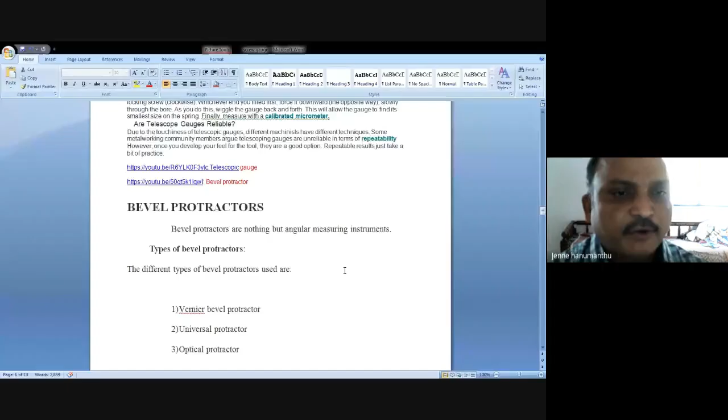We'll see. First of all, bevel protractor. So what is a bevel protractor? Bevel protractors are nothing but angular measuring instruments. These come under angular measuring instruments. There are different types, but vernier bevel protractor is a vital instrument for measuring unknown angles.

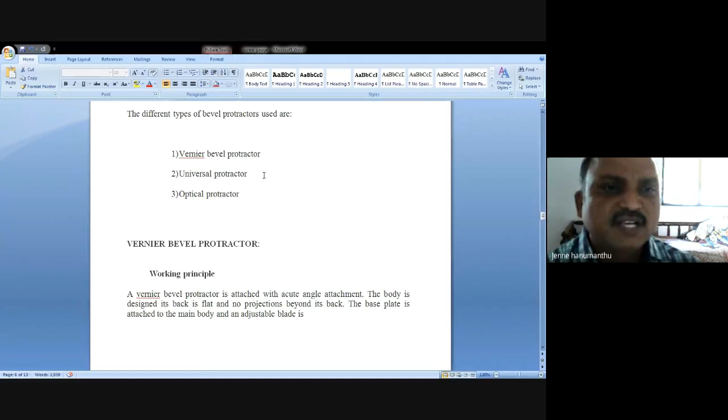Vernier bevel protractor, the parts are basically like this. Observe the parts of this. I'll give some video link for this, don't worry, you can observe.

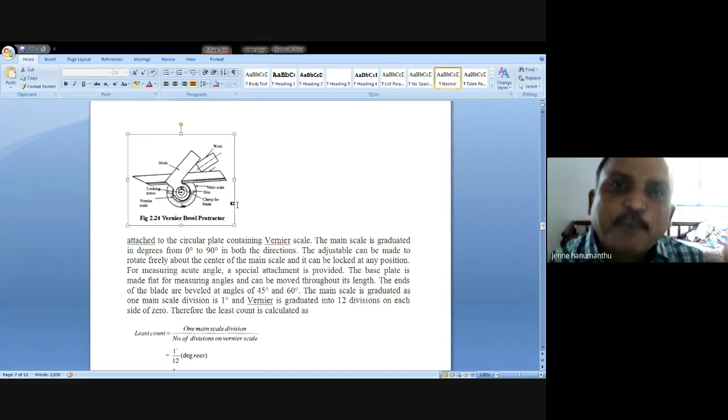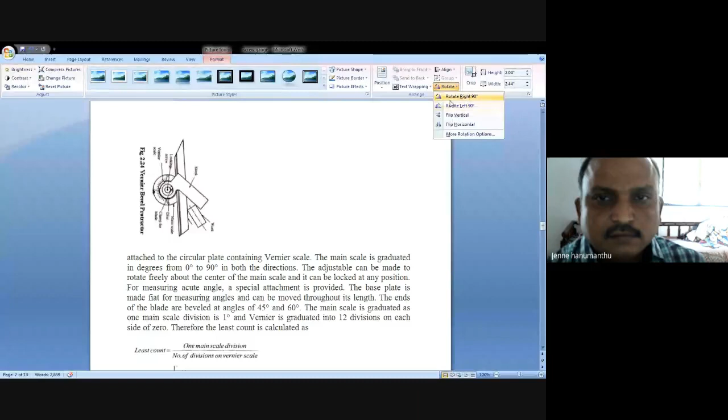This vernier bevel protractor has two scales, like vernier caliper. The bevel protractor also has two scales. One is the main scale. All of you observe clearly. This is called the main scale.

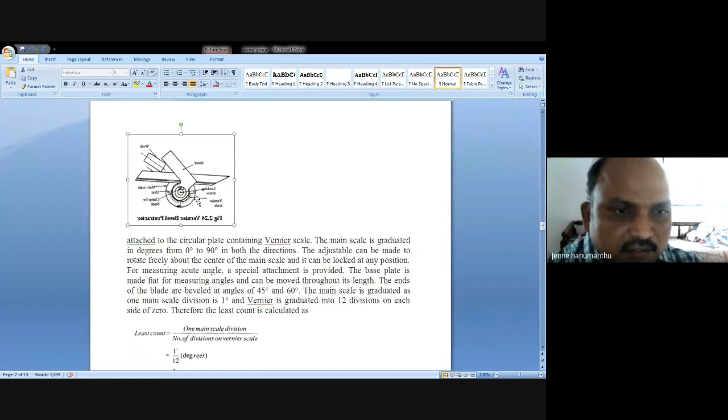Is it visible to you, Kamali? Yes, sir. This is called the main scale. The main scale is divided into a number of divisions in terms of degrees.

Next, internally we have another scale. This is called the vernier scale. So we have the main scale and the vernier scale.

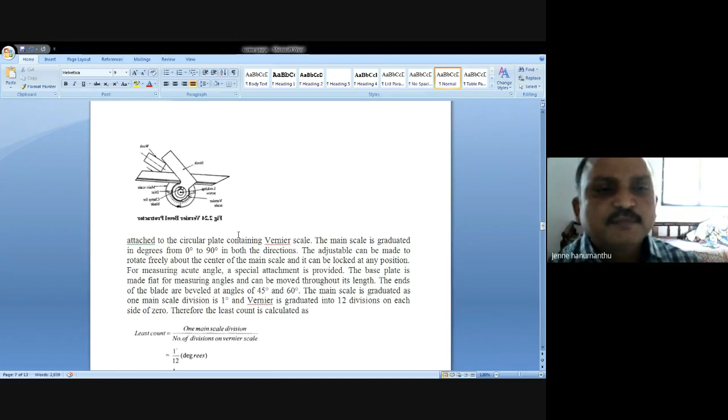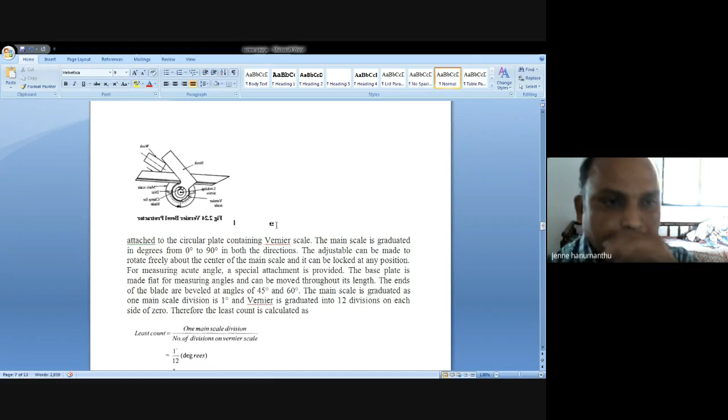But the question is, how do you calculate the total angle? Total angle means, first of all, you take any material for which you want to calculate the angle.

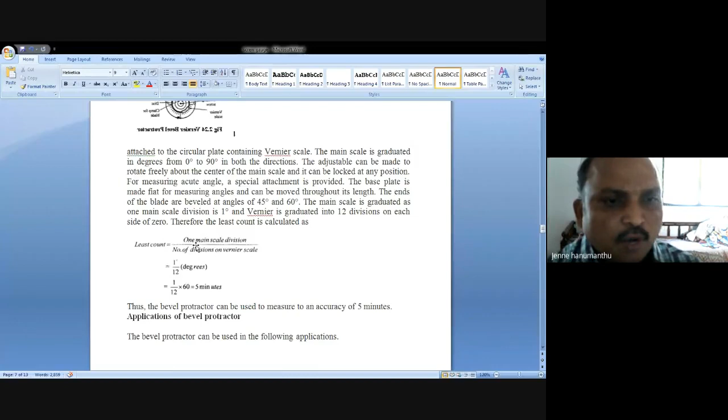Before that, least count. For example, least count equals one main scale division divided by number of divisions of the vernier scale. This is the usual general formula: one main scale division divided by number of divisions of the vernier scale.

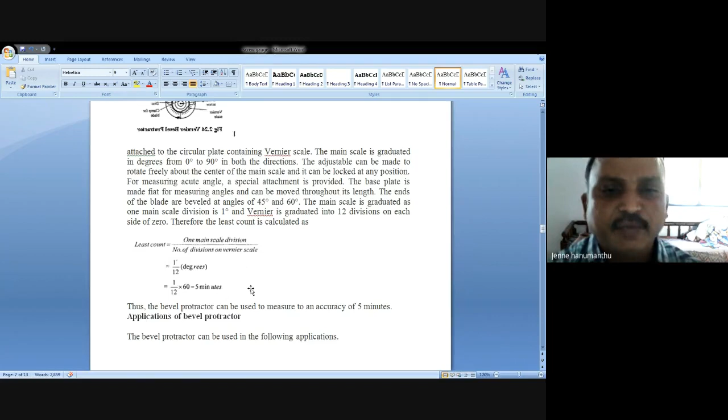So one main scale division is 1 degree, divided by number of divisions on the vernier scale, which is 12. So 1 by 12 into 60, because we want to calculate in minutes. So 5 minutes you make it, so the least count is 5 minutes. We are speaking in terms of minutes rather than degrees.

Then the unknown workpiece is placed here. Say it is an unknown workpiece, called the workpiece. For this, we want to calculate the angle. How much angle is this workpiece provided with?

Remember, this is called the base. In between these two, we are placing our workpiece. We want to measure this angle. How much angle is it?

With the horizontal line, this is horizontal. Horizontally, how much angle is it going to provide? That angle we want to calculate. So it can be calculated.

It is adjusted using both the main scale and the vernier scale. The two are disturbed from their initial position. When you insert the workpiece, these two are disturbed, and it provides some angle. Because of that angle, the divisions on the main scale as well as the vernier scale are disturbed, and the scales get modified.

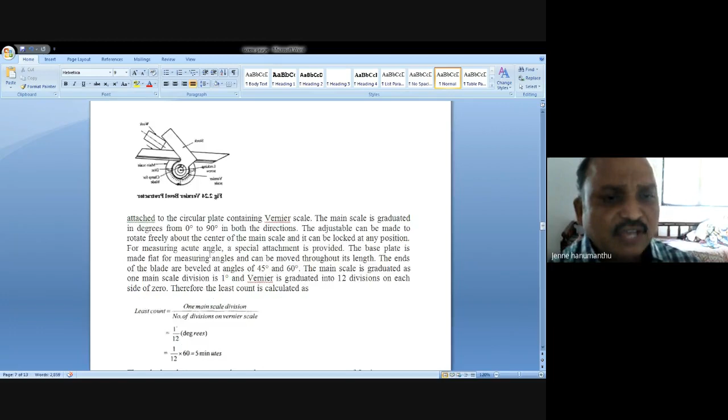That reading you want to calculate. How do you calculate it? I will tell you the calculation. Main scale total reading equals main scale reading. How do you calculate the main scale reading?

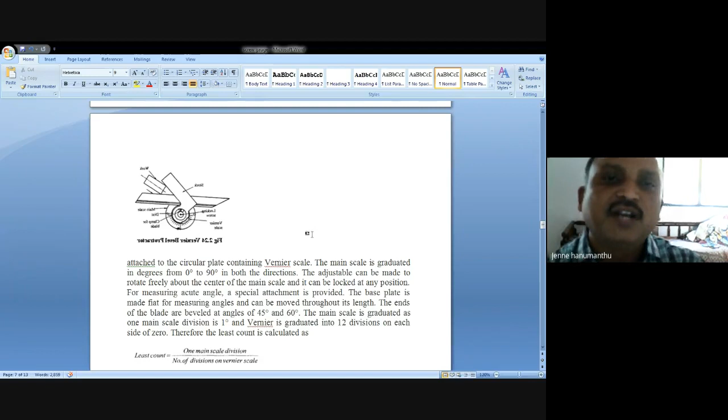The zero on the vernier scale will touch or coincide with one of the readings on the main scale division. That gives the main scale value. One of the readings on the vernier scale will coincide with other readings on the main scale, giving a vernier reading. That should be multiplied with the least count. So add the main scale value plus vernier scale reading into least count to make the total reading. That is how we measure the angular value of the unknown workpiece using the bevel protractor.

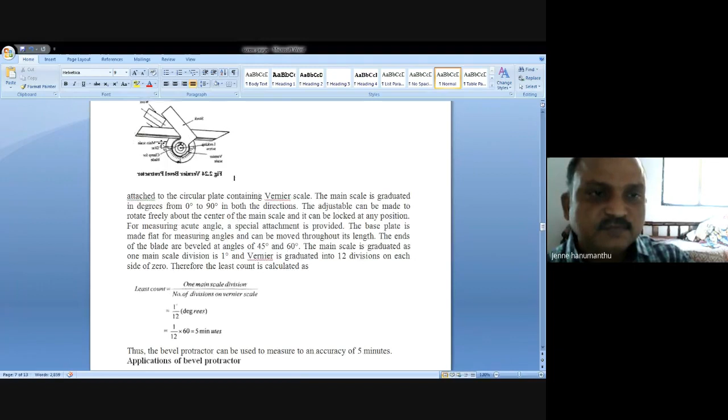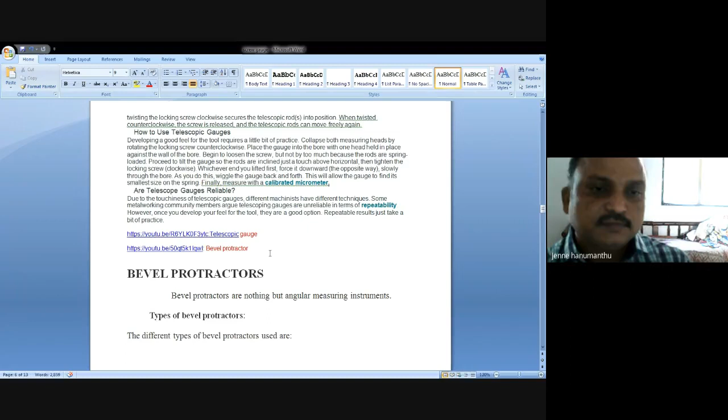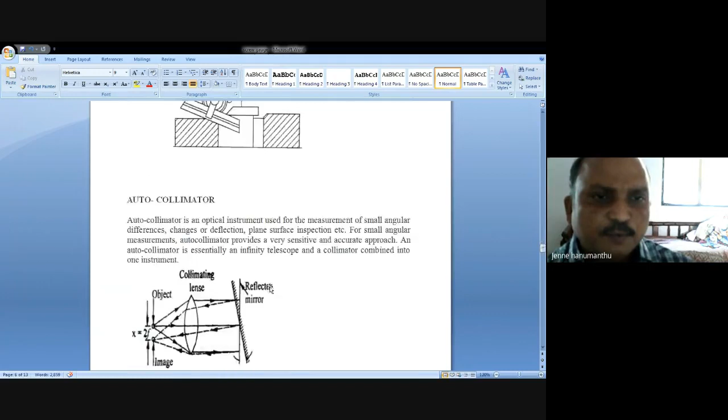This is called a vernier bevel protractor. We place it not only for a simple workpiece but also for different dimensions. For example, for checking a V block, a complete block, this corner, this V-shaped line angle can also be measured.

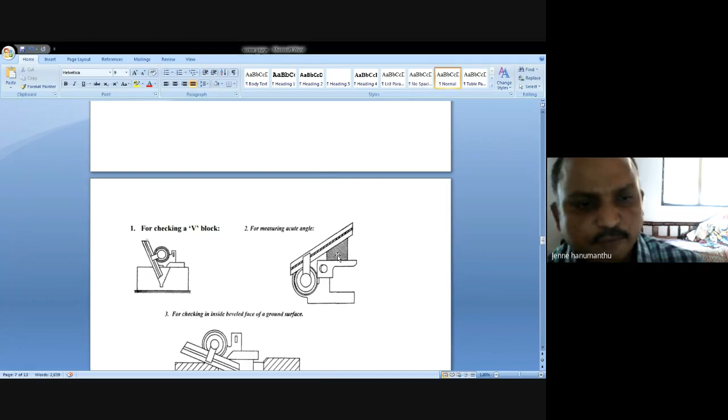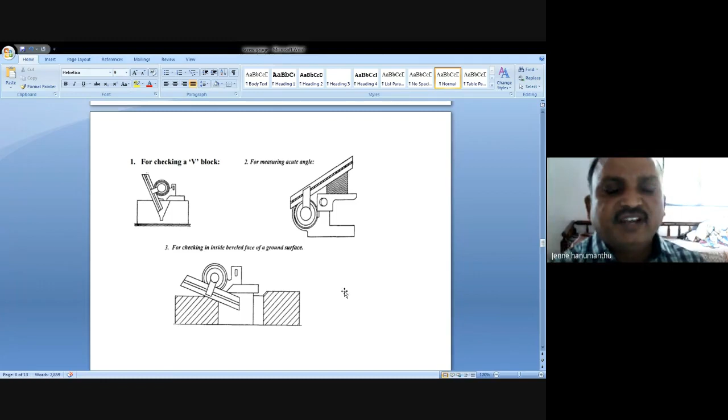For measuring acute angles, you place this type of unknown workpiece and measure like this. For example, at the end corner of this workpiece, you can also measure the angle. So the angle of any workpiece is possible with the bevel protractor. The only thing is main scale value plus vernier scale into least count, which gives the total reading in terms of minutes, or you can convert it into degrees. That is about the vernier bevel protractor.

Next is the sine bar. Sine bars are always used along with slip gauges as a device for measuring angles very precisely. The main advantage of the sine bar is that it measures angles more accurately than the bevel protractor, and it locates the workpiece to a given angle with high precision. So the sine bar is more effective and accurate than the bevel protractor because of its structure.

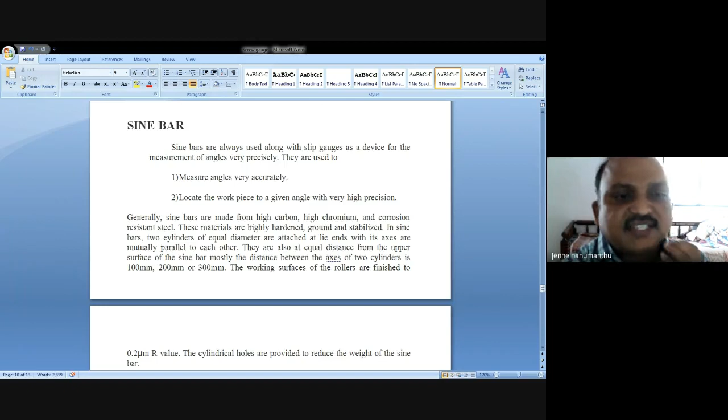Generally, sine bars are made from high carbon, high chromium, and corrosion resistant steel. So the sine bar is nothing but steel, made with high carbon, high chromium, and corrosion resistant steel. These materials are highly hardened, ground, and stabilized. In sine bars, two cylinders of equal diameter are attached at the end, with their axes mutually parallel to each other. See the diagram: this is the sine bar steel, with end one and end two, where balls are placed.

These are called balls or two cylinders. Two cylinders of equal diameter are placed, attached at the ends, at the corners, with their axes mutually parallel to each other.

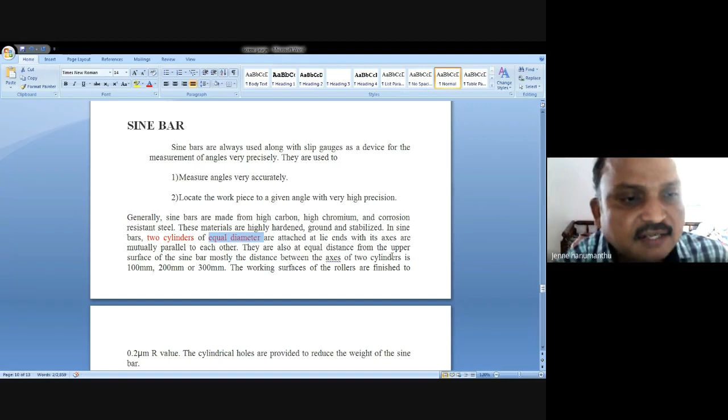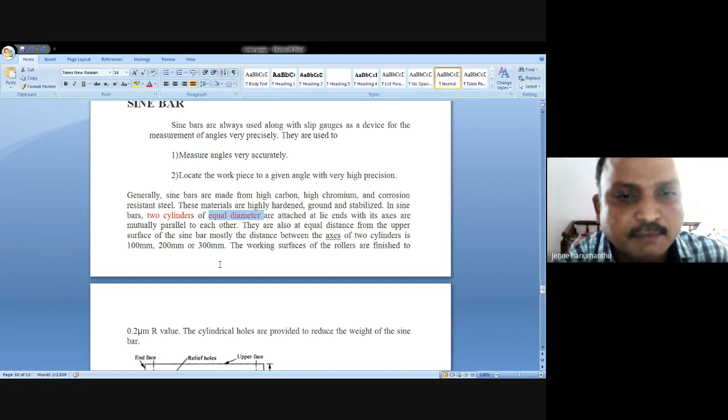They are also at equal distance from the upper surface of the sine bar. Mostly the distance between the axes of the two cylinders is 100 mm, 200 mm, or 300 mm, depending on the design, measured from this axis to that axis. The lower surface is called the lower surface, and this is the upper surface. The distance may be 100-100, 200-200, or 300-300. My sine bar has a 100 mm distance structure; yours could be 200-200; Bhavesh's sine bar might have 300-300. Don't worry about the exact dimension, you can fabricate your own sine bar structure.

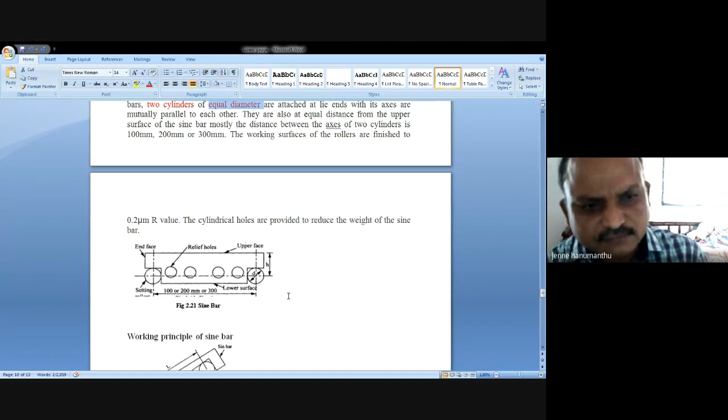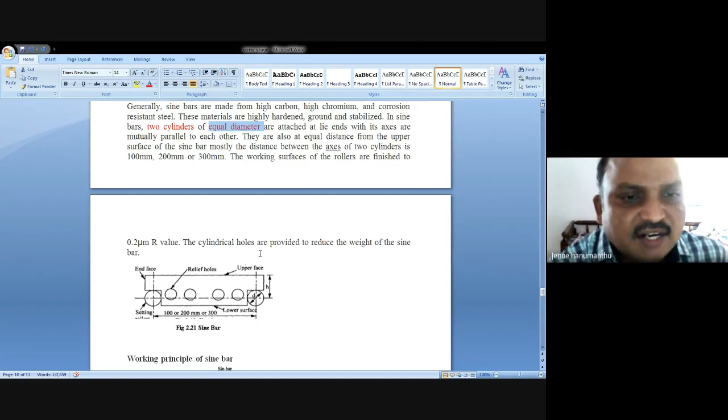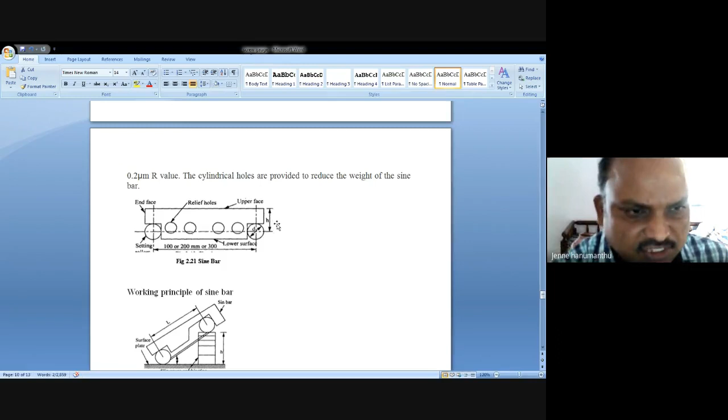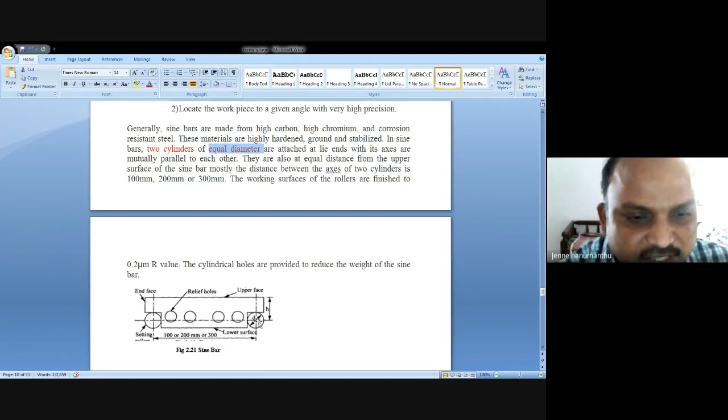So what is there in this structure? The working surface of the rollers is finished to 0.2 µm. The cylinder holes are provided to reduce the weight of the sine bar. Now see the dimensions: the steel ball diameter is d, and from the diameter to the upper surface is h, small h. So the cylinder diameter and the height from this axis to the upper surface, small h, are known initially, while the sine bar is being fabricated.

Then, how is the sine bar measured? What is its working principle? The working of the sine bar is based on the trigonometric principle. What is this trigonometric principle?

Tan theta equals to so and so. Sin theta equals to so and so. Cos theta equals to so and so. This is called the trigonometric principle.

To measure the angle of a given specimen: say I want to measure the angle between this horizontal line, the surface of the plate, and the workpiece, from here to here. This horizontal line is the base line. How much angle does this workpiece make between these two? That angle I am going to calculate.

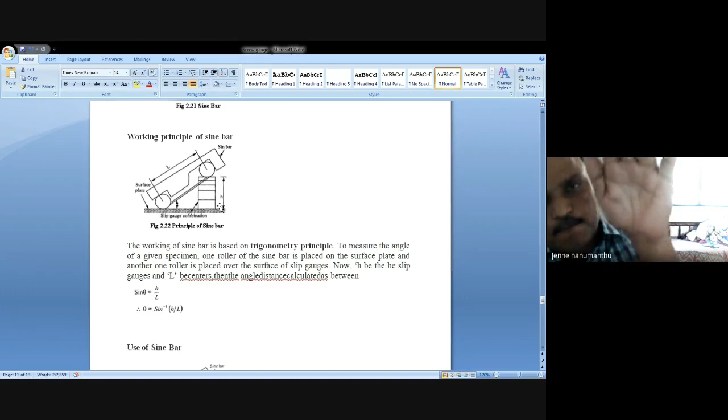How is it possible? This angle can be calculated like this. The total structure, the sine bar, will be placed on the workpiece. Just place the sine bar on the workpiece, attaching one end on the workpiece and the other end on the base on the ground. So it creates some angle.

From this place to this place, from the center of one axis or diameter to the center of the other cylinder, it gives some length, capital L. And from here, the surface to this surface, it gives some H. These two are known. If these two are known, theta can simply be calculated.

You may have one more doubt: how do you calculate this H? This H is known, not unknown - known heights you have to place. So this is known and this is known. This angle is unknown. So these heights, yeah, I will tell you.

To measure the angle of a given specimen, one roller of the sine bar is placed on the workpiece on the surface plate, and the other roller is placed over the surface of slip gauges.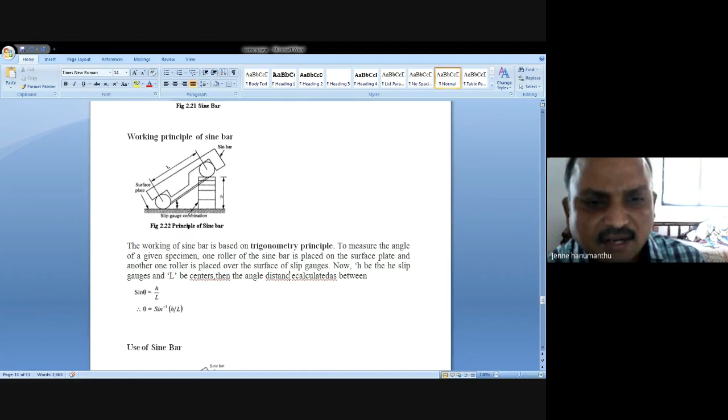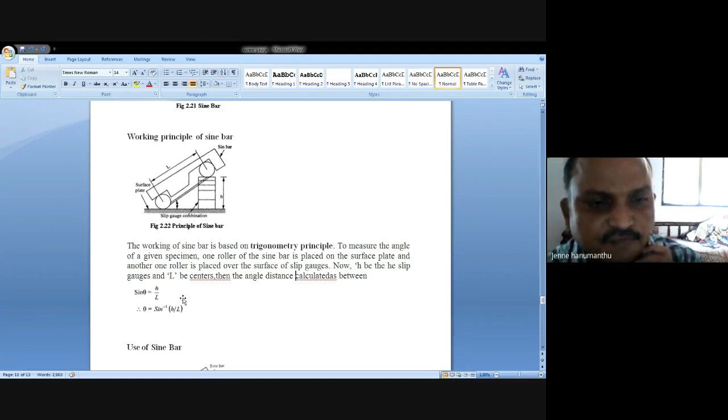Now let H be the slip gauge height and L be the distance between centers, then the angle can be calculated like this: sin theta equals H by L.

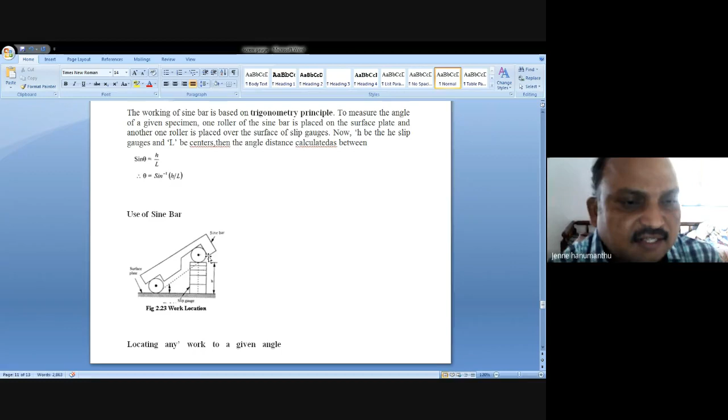This is L and this is H. If you know this L and this H, we can easily calculate. Have you understood this? How to calculate this H? We already have to know this H value, and we want to know the distance between these two. So for this workpiece, this angle can be calculated.

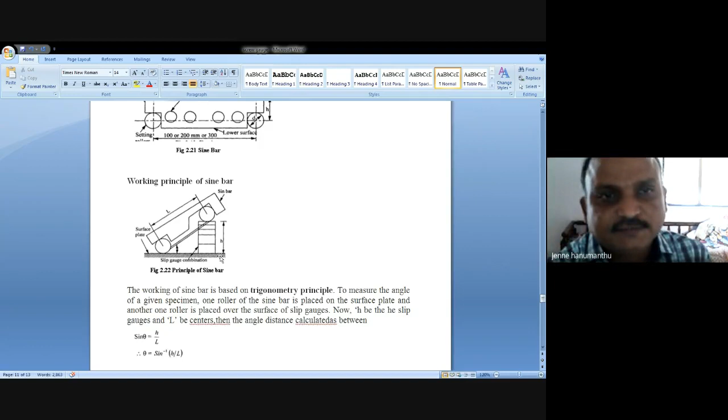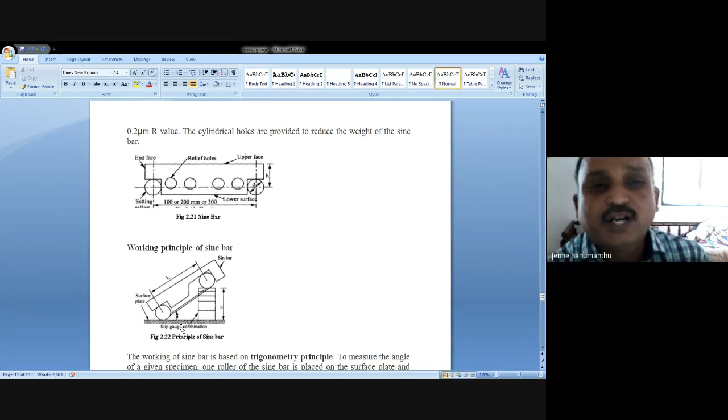Of course this H is going to vary, and the angle is going to vary, right? For different workpieces, the H is going to vary, so that angle is going to be calculated: theta equals sin inverse of H by L, where theta is the unknown angle of the workpiece. Like this, you can easily calculate it.

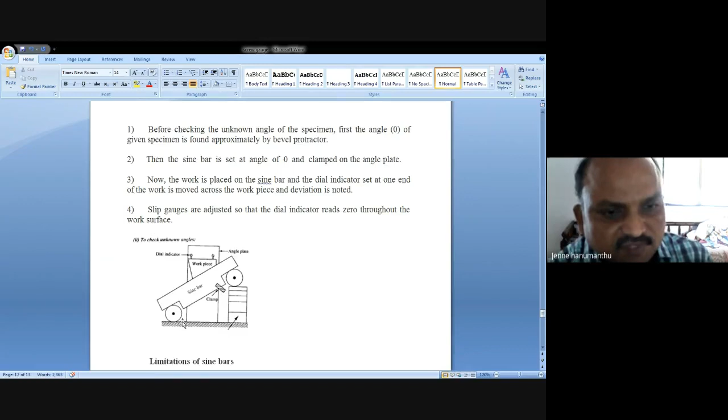Different workpieces - see, this is a workpiece. This is also another workpiece. See, clamp - this is another workpiece.

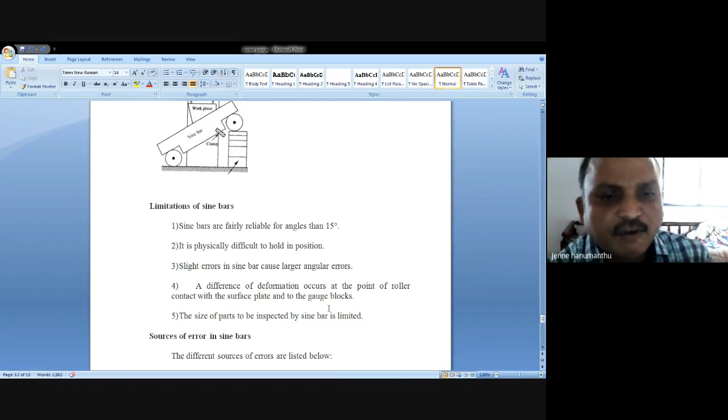Limitations: sine bars are fairly reliable for angles less than 15 degrees. It is physically difficult to hold in position - this is a difficulty in placing the position. Slight errors in sine bars cause larger angular errors. A difference of deformation occurs at the point of roller contact with the surface plate and the gauge blocks, so deformation occurs. The size of parts to be inspected by a sine bar is limited, so what sizes we have to select is a different issue, a different problem.

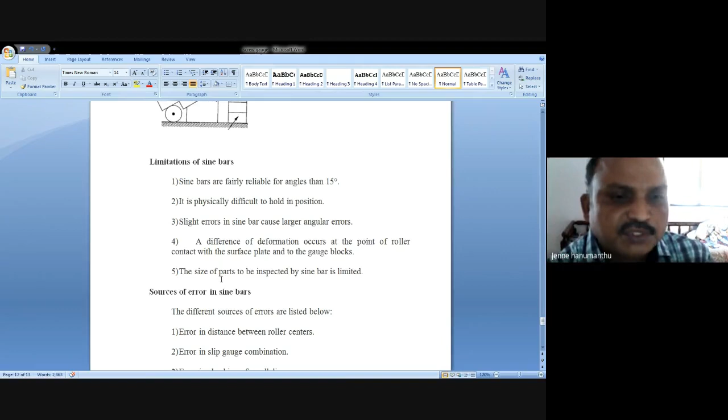What are the errors that can affect this? Errors in distance between rollers, errors in slip gauge combination, errors in checking of parallelism, errors in parallelism of roller axes with each other, errors in flatness of the upper surface of the cylinder - these are all some errors that affect the sine bar.

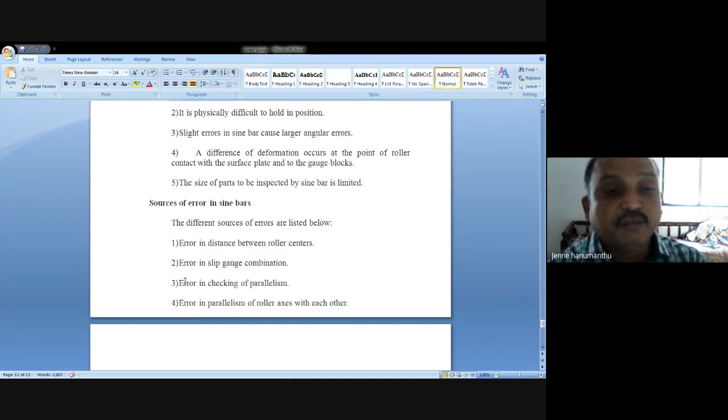So, compared to the bevel protractor, sine bars are effectively measured with fewer errors. This bevel protractor and sine bars are, as per the syllabus, both very important for measuring the unknown angle of unknown workpieces.